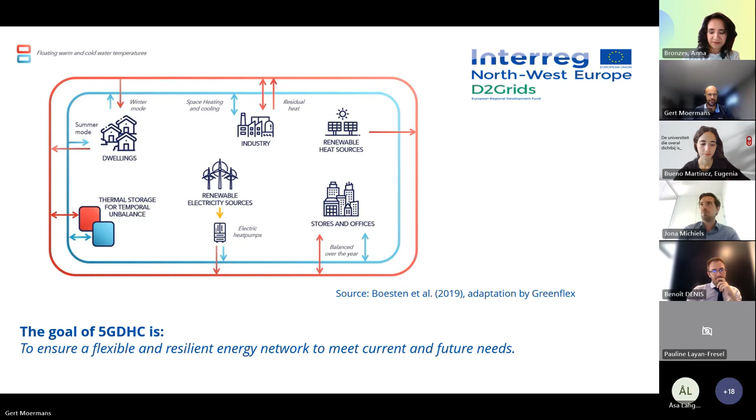This is what 5G is all about, and we summed it up in five core principles, which you may already have seen before. We aim for 5 core principles, which also nicely relates to a 5G network. The first one is that we like to close the energy loop. So we will focus on exchange of heat and cold between the end users.

The second is we want to use low-grade sources for low-grade demand. So we are certainly not focusing on high-grade demand. And if a high-grade source is available, we would only consider it as an extra and not look for a high-grade source as a primary source of the whole system. The third principle is about being decentralized. So we only want to deliver the energy when it's needed and where it's needed.

So we want to distribute the energy and elevate temperatures or reduce temperatures as close as possible to the end consumers or end users. And we want to integrate the approach of energy flows. You can already see that there's a solar pictogram indicated. So we want to integrate every possible energy flow within our whole system. And then the last one is focusing on local sources.

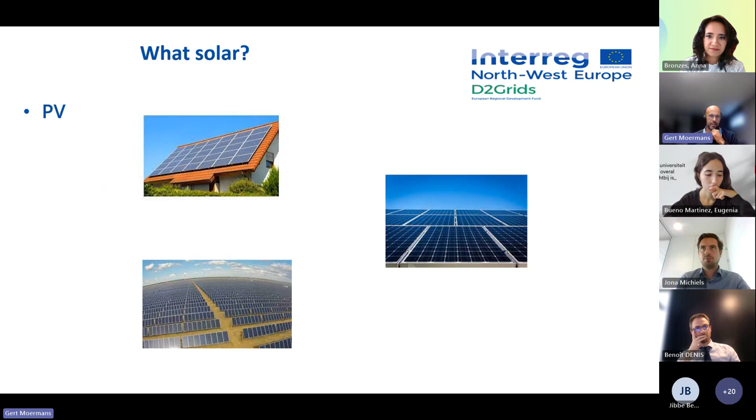I think we all know these PV panels, but when we look at PV panels in a 5G system, we mainly look at PV panels on an individual building, on an individual house, but they can also mean having a PV installation, like a PV field that is connected to the system. It can be small scale, it can be large scale, whatever. Then of course we can integrate it in the whole system. It's just, I think, well known for everybody in this meeting.

The next one of solar that we could use within a 5G system is to integrate solar collectors. That's mainly the same idea as using PV panels, only here the energy from the sun is directly converted into thermal energy and not into electrical energy. So we are producing hot water within our system that can be used by local users or can be distributed to other parts of the system.

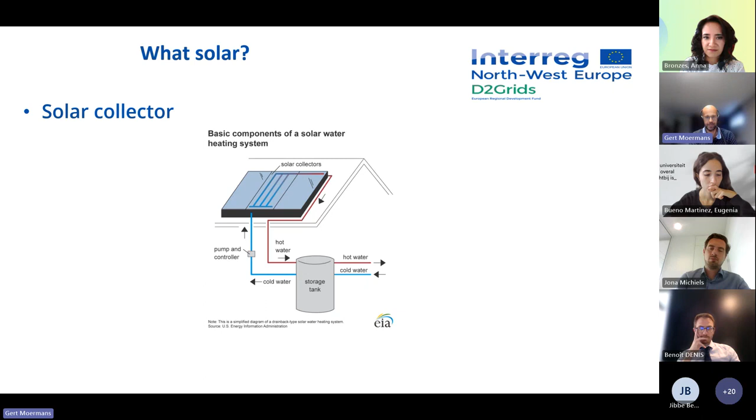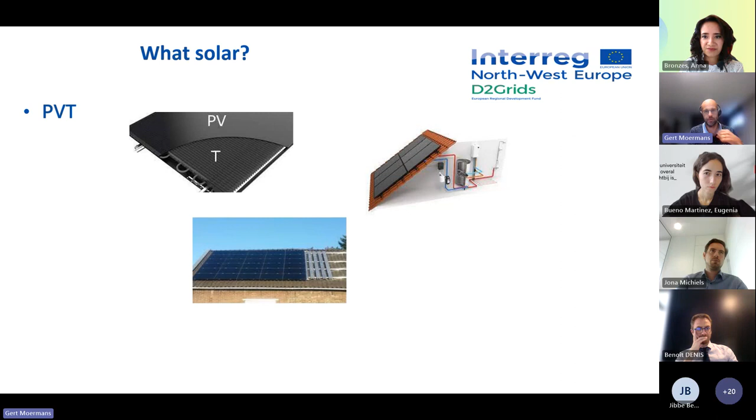I also would like to indicate, and we have a specialist who will give a presentation later on, that we can also use PVT in this setup of our 5G design, which is actually an integration of the two previous ones. We can use solar panels for production of electrical energy, but also for thermal energy. And when you combine these two, you come to a PVT panel.

The next one, more exotic, is using concentrated solar, which is kind of a big installation, and you will see in the next examples that it's not always the best solution to integrate it in a 5G DHC system. But I will use these four examples later on in the presentation to give you an idea if they're a good idea or not to integrate them in a design of a 5G DHC.

So for the CST, you have several options, but they mainly have the same principle. They use the solar energy with mirrors, which can be curved or flat, and they all concentrate their solar energy to one point at which you can have high temperature water production or whatever.

So why would we like to have solar in our system? And is this solar then a local source? Because the sun is not really a local source. Can we consider it as a local source? We said that in a 5G system we would like to have as much exchange of energy as possible, but how do we use this solar for exchange of energy? Can we store this energy somehow, because that will be needed if we would like to make use of this energy in all its forms.

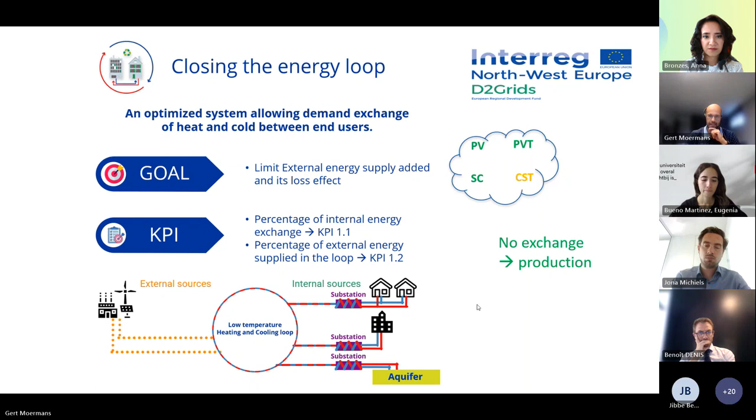We would like our system to be decentralized and demand-driven. So there too, we've set some KPIs. So we want to reduce the thermal losses within our ambient loop, and we want to have as much as possible active substations close to the end users.

It's not directly linked, but of course the PV, PVT, and other solutions, they are local, they are decentralized, they're mainly on building level. So they probably can have some influence. It's not clear. That's why I've put them in orange again. CST, however, is a centralized solution mainly, and they will not improve the KPIs of being decentralized or demand-driven.

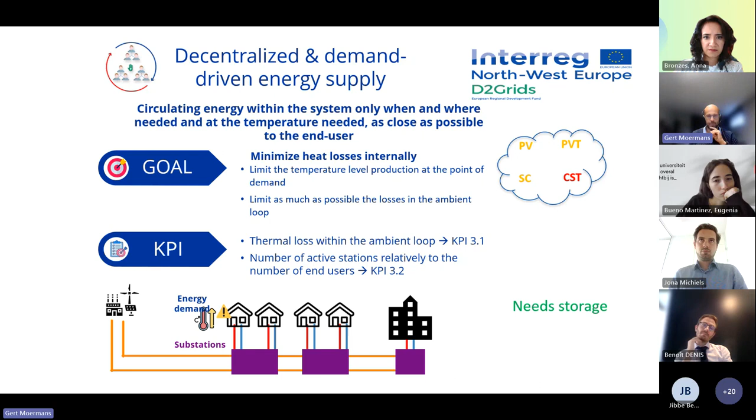So what we basically need to improve is we need storage. So if this electricity or thermal energy is produced on building level, and we want it to be decentralized and demand driven, we need storage to optimize this. So as a solution alone, it's not beneficial, but in combination with storage, it can improve the KPIs.

When we look at integration of energy flows, I think that's the most clear one. If we have other energy flows from electricity, from other sources like this concentrated solar, we will certainly be able to reduce peaks within our system, and we will hopefully reduce the total capacity which is needed for heating and cooling, as we have this as an auxiliary system, let's say, of our energy production.

This too needs to be combined, I think, with storage, and it is mainly focusing on heating. So for cooling, we have the conversion still of electricity to cooling via dry coolers or other systems that are installed.

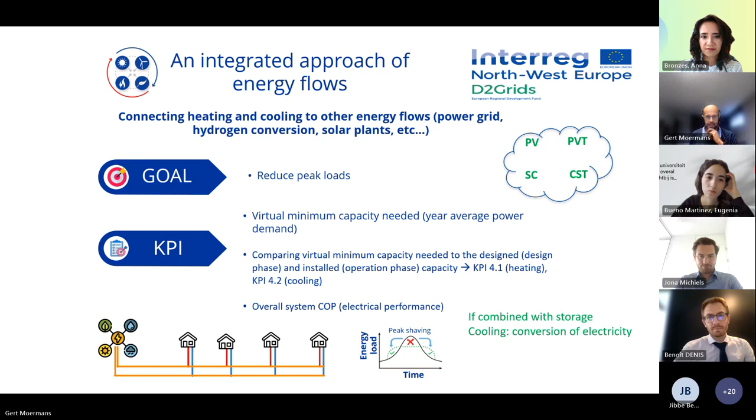Local sources, I think that's clear. If we have PV installed, PVT, solar collectors, or CST, they're all local sources, so they will clearly contribute to improving the KPIs of being local, of having local sources.

So as a summary, maybe, if we use solar and 5G DHC, solar, the electrical part, I think it's clear that there's a need for storage as well, combined to it, storage in some form. The most obvious one is battery storage, but there can be other forms as well. It can be conversion to another energy component. So there might be several solutions.

We can clearly do peak reduction of the electricity demand by using this locally produced electricity. So we will actually not generate big peak demands from the grid, at least not as big as they used to be before the installation of electrical solar PV panels. So we will reduce the electricity from the grid.

In some of the examples that we have studied, we could see that if there's an excess of electricity production, you could use this for balancing your geothermal, so for generating extra cooling. But this will influence the first principle, as you will probably not close the energy loop, as it's mainly done by dry coolers. So you will actually generate an open loop system. So there are some pros and cons to do this.

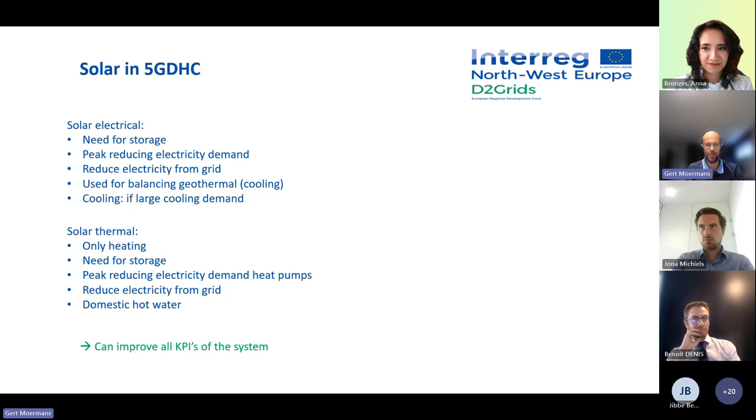Yeah, thank you, Gert. It was a really interesting presentation about KPIs and introducing solar in 5G DHC systems, and really this question about, like, if the solar improves the KPIs. I think we're almost convinced about that. And let's hear other presentations of our speakers, and we can draw up some conclusions at the end.

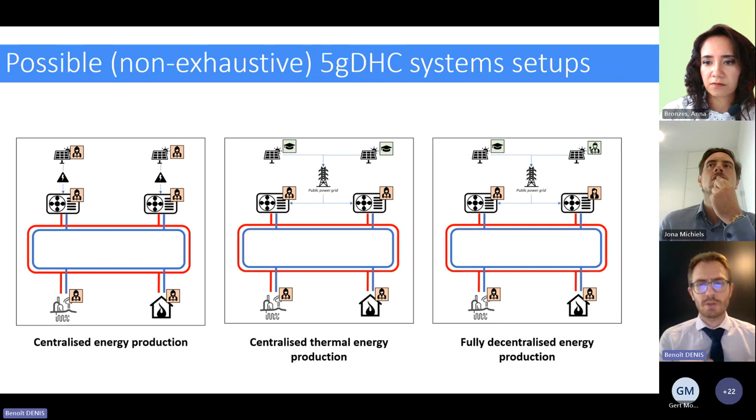And then once you have all these ideas of who produces what, you can play with your 5G DHC system, because, for instance, here in the figure you have on your screen, you can have some dwelling somewhere over the network who produces electricity and can give it away to the heat producer, which is another dwelling, another part of the network, because this dwelling needs heat at that point in T1. And then in T2 maybe you cannot produce solar energy, but still the solar producer, who is also a dwelling, needs heat for his own benefit.

And then you can also have mechanisms where you exchange solar power in the first period in exchange for heat in the second period. So the fact that you can couple both technologies gives you a lot of flexibility to the system, even though you only rely, for instance, on financial mechanisms and not only on thermal storage. You cannot couple solar power to 5G DHC systems the same way in other countries because of the regulations.

The most common way to commercialize, for one PV producer to provide electricity to a heat producer, you will find pretty much all over Europe, except, if I'm not mistaken, in France and in the French part of Belgium. You can install your PV power plant anywhere on a private grid and then sell your electricity to, I don't know, the owner of the house. That's the basic framework, and that's the most efficient framework. But unfortunately, that's not the case we see in France.

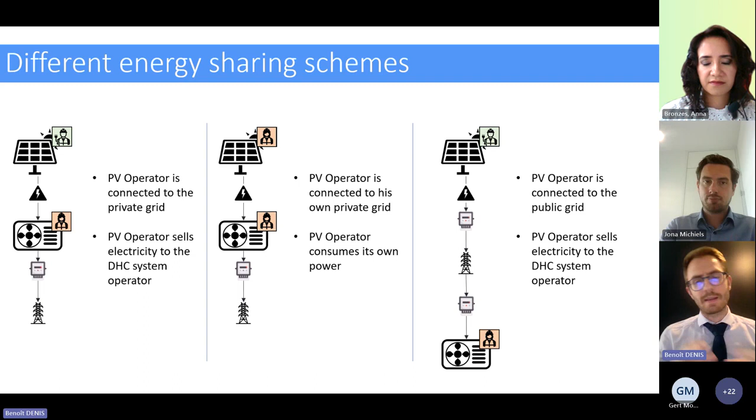You can also have another framework which is allowed in France, where the same person who produces solar power also produces the heat. Basically, that would be the house owner having his own solar panels. But that means he needs to operate it by himself. And then you have a third scheme, which is available pretty much everywhere over Europe, where you can connect your solar power plant to the public grid and then sell your electricity to the heat producer. But all these schemes, it's not always that simple, and you have some constraints.

What you have here in France is the only way that someone can produce solar power to his own benefit and to power the heat pump: you need to be the operator of the solar plant. The only flexibility you get is that you don't need to be the owner of the solar plant, but still you need to be declared as a solar power producer if you want to be able to consume your own energy.

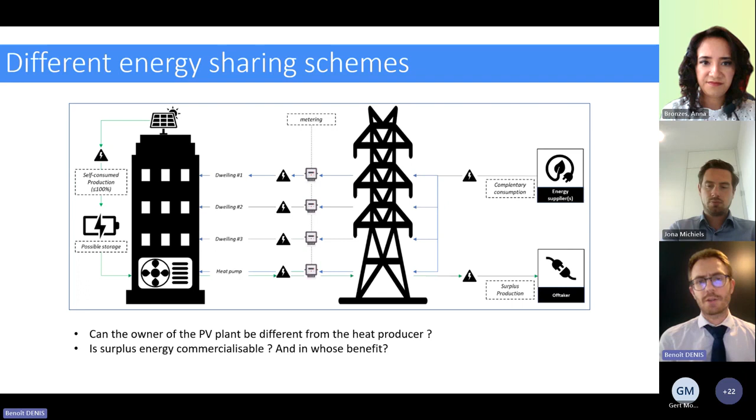The second scheme that we have is what we call a collective consumption scheme. Under this scheme, you basically have a power producer who injects the electricity into the public power grid and sells it to some specific customers. It's been hard to develop the whole scheme, but now it's pretty efficient. But there are a lot of tax disincentives to this solution that make it less attractive than the first one that we saw before, which is the individual self-consumption scheme.

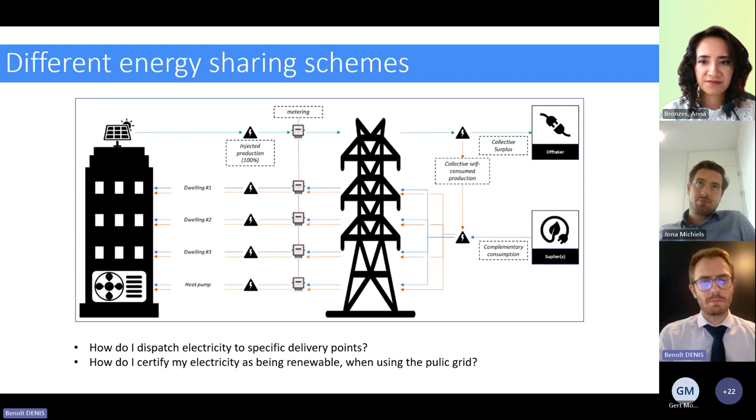For the collective self-consumption scheme, there are lots of constraints. You need to sell to somebody who is within a 2-kilometer perimeter. You cannot have too big power plants. It's electricity only. But the good thing is the way the electricity is dispatched to the withdrawal delivery point. This is all done by the distribution system operator, which is much less expensive than what you would have in power purchase agreements.

We have one last way of distributing and commercializing energy, and this last way is through power purchase agreements, what we know as power purchase agreements pretty much everywhere in Europe, which is a direct agreement between a producer and the consumer. By itself, it's not that difficult. You have a producer, you sell all your electrons to the consumer, and your consumer is the heat producer, who uses it for his heat pumps, and that's basically simple.

The problem is that where you have a 5G DHC network and decentralized production and decentralized consumption, you may need one production asset to be able to dispatch the energy to several consumers. That would be the most efficient way of maximizing renewable energy use within the network.

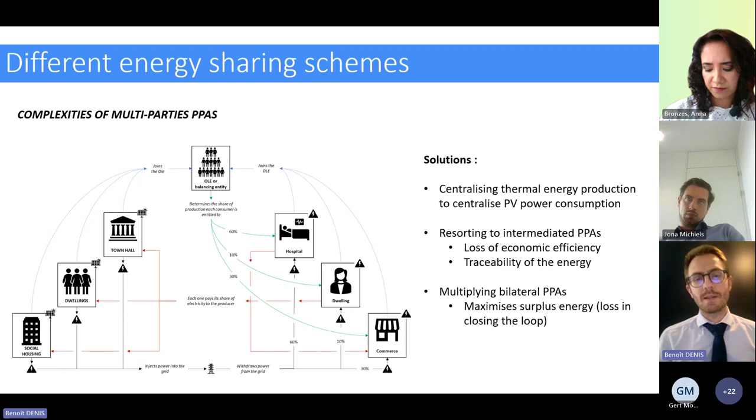The last solution would be to multiply bilateral PPAs, which would mean the town hall enters into one PPA with the hospital, with the dwelling, with the commerce, and so on. But that would be an extremely tedious exercise, and we would really not want to incentivize these kinds of solutions.

We need also to consider taxes, which are a very, very important key of solar energy projects and their coupling with the 5G DHCs, because usually taxes are capable of making a business case or not. In France, and you will see the same kind of tax regulations pretty much everywhere else,

you will almost all the time have an excise duty, which is a tax that is imposed on consumption. In France, it ranges from 22.5 euros per megawatt hour to 32 euros per megawatt hour, depending on the power that you request. Before the events in Ukraine, excise duty amounted to about 1/4 to 1/3 of electricity invoices every month. So this is really important.

Then you have grid access fees. These are fees that are used for public grids. And then production tax, land tax, VAT that we may all know. The way you can find tax exemptions will be crucial to setting up your coupling.

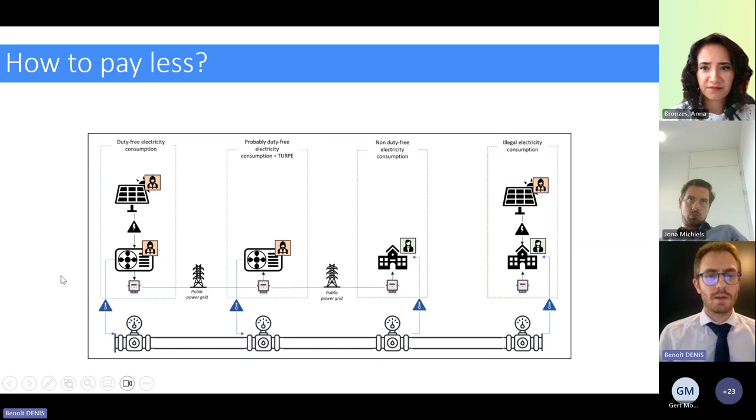All these amount to some organization of your operation. We are talking here about energy projects, and when you think of energy projects, you will always have these five items in mind. The first one is grid connection. You will need to have a relationship with the DSO, because whatever the setup, you always need to connect your plant to the public grid, or at least in France that's the case. You cannot be fully off grid without declaring your power plant being off-grid and somehow connected to it.

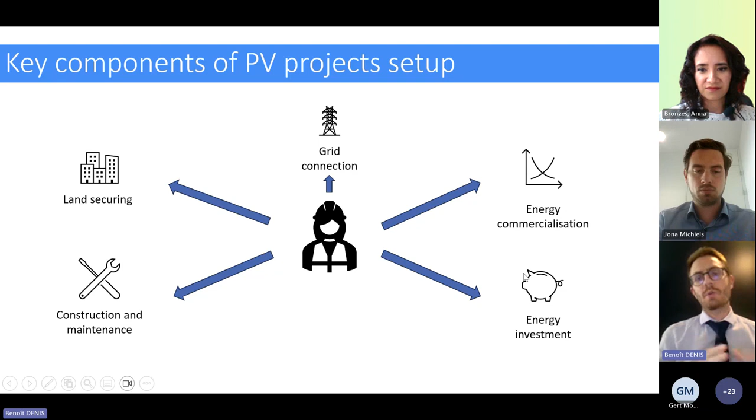You have construction and maintenance, obviously, except if you are capable of doing it by yourself, but that's almost never the case. Energy commercialization, which we already saw a bit before. Land securing, which is you need to put your solar panels somewhere, and so you need to be sure that you have the right to put them there. It's straightforward when you're the owner of the building. But when you think about 5GDHC systems, you will have public buildings, commerces, a lot of different situations. So you need to really focus on land securing. And the last one is the energy investment, which is really proper to any project finance project.

In terms of land securing, what you will seek are long-term leases, because if you dismantle a solar power plant, the value of the power plant drops so much that once it is in place, you really need to make sure that it stays in place until the plant is dead. So you need a long-term lease for 20 to 30 years minimum. What you also need are in-rem rights. It's a special kind of rights where the rights follow the building and not the owner of the building, which means that if the owner sells the building, you can keep on staying on the building. If you don't have these in-rem rights, the next owner may kick you out, and then you will be in big trouble.

The second one, with respect to construction and maintenance, you have the EPC contracts, engineering, procurement, and construction contracts. Make sure you have a performance guarantee in these contracts. What we see is about 95% of performance, which is unlikely to be accepted in operation and maintenance contracts. Completion bonds: you usually have a retainer of about 5% to make sure that the solar power plant is fully completed. And then you have the operation and maintenance contract with an availability guarantee. You need to have your power plant available about 98% of the time. Loan agreements and securities, that's basic project finance, not really necessary to develop here.

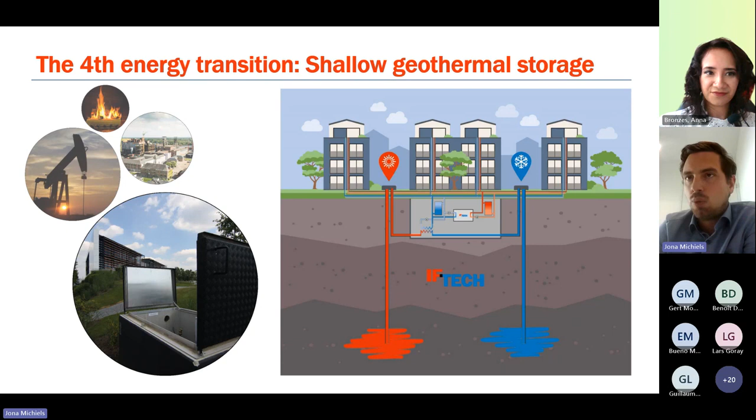So what we do is shallow geothermal energy storage. When we talk about geothermal storage, we don't go deeper than 250 meters. Most people will think of geothermal going way deeper, higher temperatures. But what we will do is basically create an underground thermal battery storage for heat and cooling, where we would capture the heat in summer and use it in the winter, using the thermal battery storage and a heat pump where we have very high COPs.

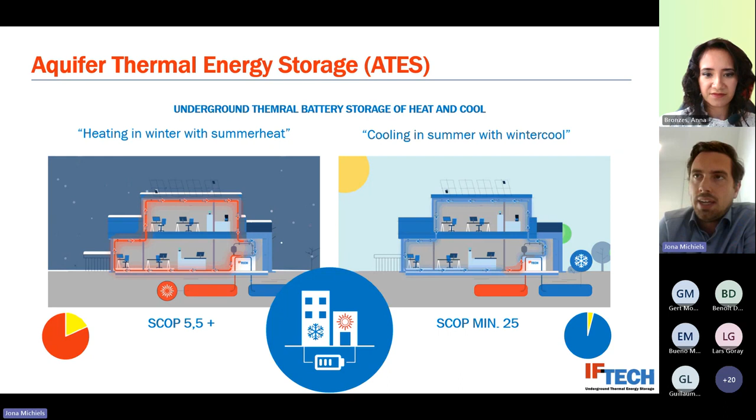Whereas in the summer, we would do the opposite. We would use the winter cool for cooling in the summer, with even higher COPs that we can achieve. So what we basically do is we connect the usage of heat and cool via a geothermal battery in the underground. Now, the technology that we would use and that we have the most in-depth knowledge about is ATES.

This is an open system where you would use an aquifer below the ground, where you would pump the water and thus create a cold and a warm bubble under the ground, which is protected in this aquifer. You can see the potential here in the Flemish region, because that's where we have the most projects, where you can see that it's not an easy fit. It's very dependent on the geothermal conditions. In the east of the country, you would have a big potential for open systems. It's not so much the case if you go more to the west.

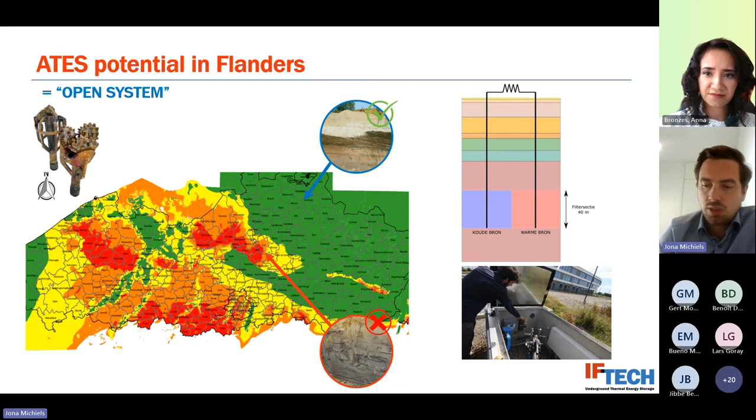But you can also use BTES, which is a closed system where you would basically have a heat exchanger in the underground, so we won't be pumping any groundwater. And here you can see the same map of Flanders, but this time the potential for the thermal conductivity in the underground. So this technology you can use almost everywhere. It's more universal, but especially for bigger projects, it's more expensive, and you have less efficient COP yields on the technical side.

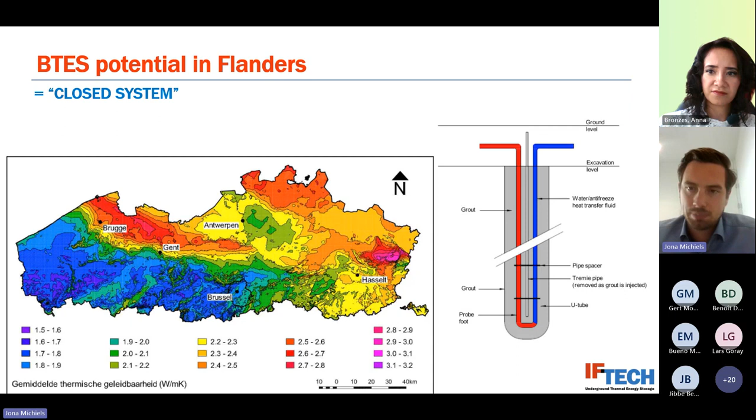A small word on who IFTech is: still a young company, 20 years now of primarily national but also international experience in the Netherlands and the UK. A clear mission and a young, driven and dynamic team that is very eager to reduce a lot of carbon dioxide emissions in new building projects.

I have with me two use cases, one already finished, the other in development, where we have installed a 5th generation district heating network. The first one is in Hasselt, which is very much to the east of Flanders, where we have 25,000 square meters of retail and a bit more than 400 dwellings, all apartments. Everything is, from an economical side, organized in an ESCO, an energy service company.

So we financed the groundwater system and the distribution, and going into the buildings, that's where our assets end. So the heat pumps in this case are not a part of the ESCO. We only provide the heat pumps with the necessary temperatures that they need for the high yields, but we don't have them in operation.

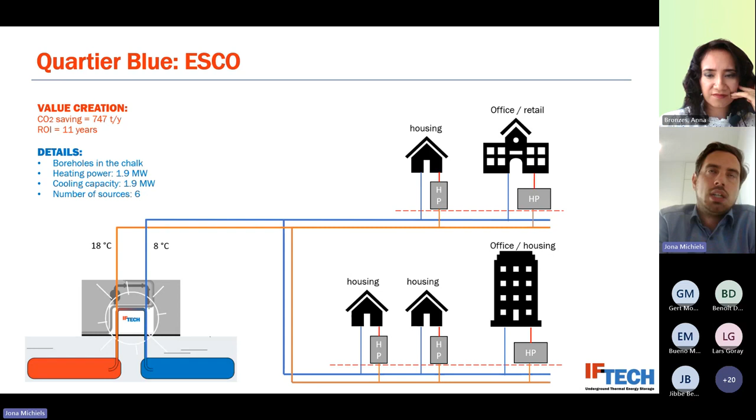In this case, this technical design with an ATES system results in an annual saving of about 750 tons of CO2. This is compared to gas, because that was still an option when this project was developed, and a financial return on investment of 11 years, doing 6 boreholes in the chalk, with a heating and cooling capacity of about 2 megawatts.

Now, the system that we use here, simply because we have multiple users, retail and dwellings, so apartments, with different needs of heating and cooling, is a 3-pipe system where we supply a semi-constant temperature of about 15 to 20 degrees, which all the users would use to make heating.

And when they make heating, so in the case of the dwellings, they will also produce cold, cooling, which then gets collected. But the opposite happens with primarily the retail that uses a lot of cooling. When they make cooling, they produce heat. So especially in autumn and in spring, the whole system in itself is already in balance.

We see, for instance, that the retail starts already in February, which is still a very cold month in Belgium. They already start cooling. And so there are multiple days in the year where the demand of heat and cooling on the district heating network is about the same energetically. And so we won't be using the groundwater system at that time. Of course, in summer and in winter, you'll have a dominant demand for heating or cooling. And then we would use the groundwater system, the ATES system, to balance the neutral net.

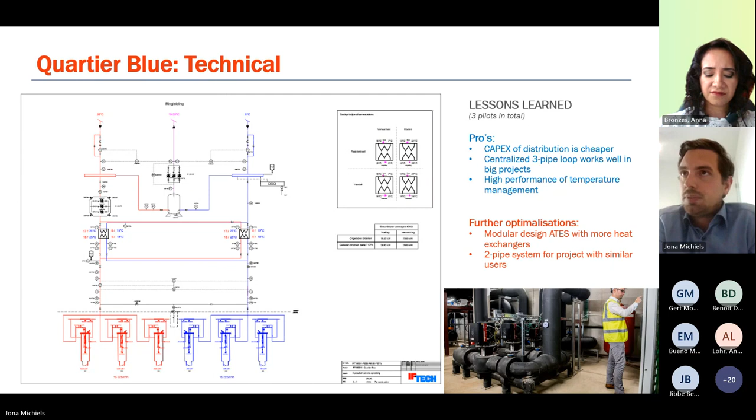Now, in this case, we don't use PVT, so we do need a balancing system, since the demand for heat and cool is energetically imbalanced in this project. But we use here surface water. That's simply because the project is located next to surface water, which is a very easy and a cheaper way to restore balance. And you can use this source either in winter to charge cooling, or in summer to charge heating, to balance out the entire system.

PV here, since the real assets that use a lot of energy, meaning the heat pumps, are not part of the ESCO, we don't have a big installation of PV. This is limited to only 50 kilowatt peak, which could be a lot more if the heat pumps were also assets of the ESCO. We are, however, still looking at an EMS implementation to have a better prediction of the yield of PV, and to then optimize our auto consumption.

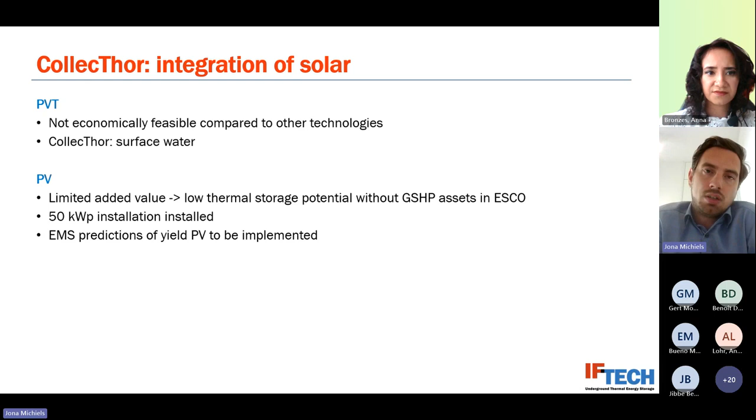Another project is Hertogensite. It's in Leuven, which is a more difficult underground for an ATES system. The very first phase we did ATES combined with surface water, but all the other phases will be BTES, because it was proven technically not feasible, or too expensive, to keep on using ATES. This program is about 10,000 square meters of retail and 465 dwellings. On the geothermal side, we would use 288 boreholes for a 2 megawatt heat and 1 megawatt cool capacity. And this would also reduce CO2 emissions by about 1,000 tons annually.

Here, it's also provided with an ESCO, so we provide heating and cooling as a service. So there are buildings with collective heat pump systems, where we would supply central heating temperatures, but everyone still has their individual booster pump for domestic hot water. So that's something that we do not provide in this ESCO.

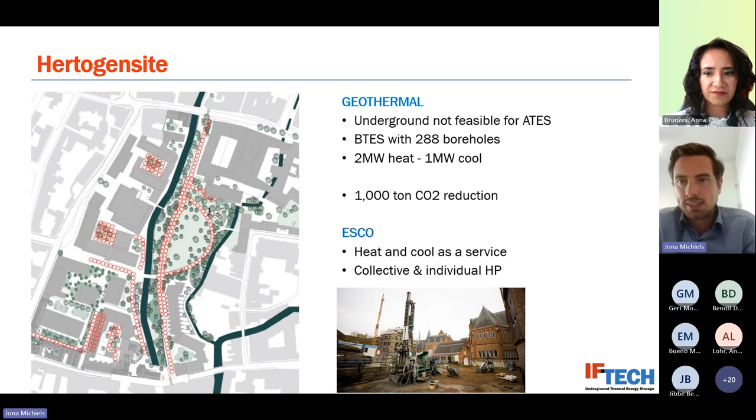Once again, if we look at the integration of solar, PVT, same issue here. I see that there's a small error in the presentation, where here we also use surface water. So you could also use more active cooling if, for instance, your primary demand is heating, or in most projects where we don't have surface water available, we would use air source heat pumps to balance out the demand between heating and cooling.

When we look at PV, since the project is still in development, we're still looking at that. Here we have a more lucrative business model and more added value, since the centralized heat pumps are a part of the ESCO, we could use this higher thermal storage potential to produce an excess of heat, for instance, when there is an excess of PV, or we would make active cooling when there is an excess of PV, but that's still to be determined.

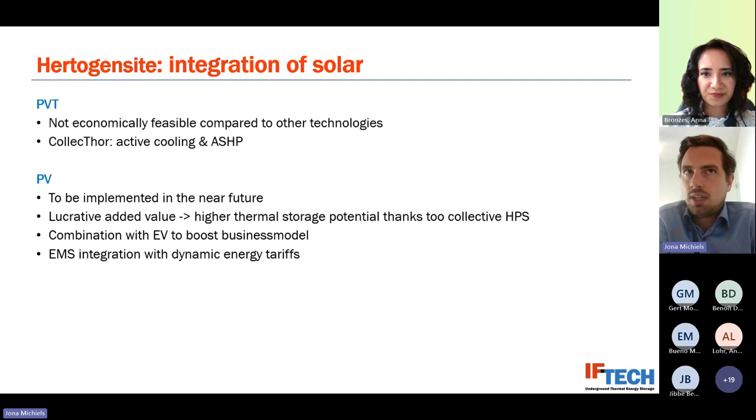And of course, here we're also looking at this EMS integration with a combination of dynamic energy tariffs, either by the availability of PV on site or just the actual hour-on-hour tariffs of electricity, where we simply could change the hour on which we would produce heating or cooling, depending on the tariffs that are active on the grid. So that was it from my part.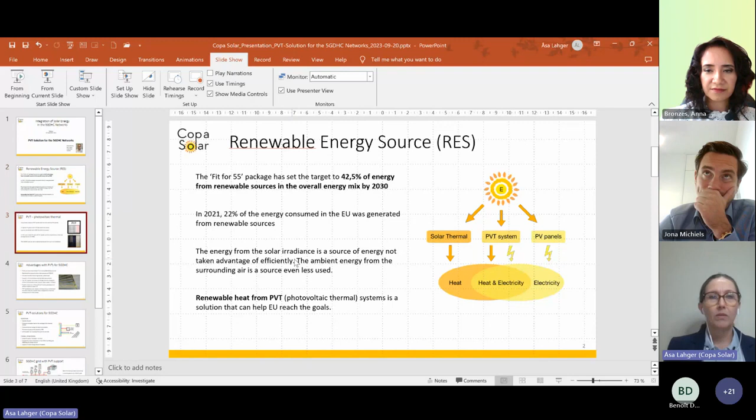In order to meet the demands for Fit for 55, we need to meet the new demands, 42.5% of RES, renewable energy sources. The possibility to use more of the solar irradiance exists, instead of just producing electrical energy from PV panels. With the help of PVT panels, we can produce much more energy. So the solution with our PVT panel is, if you see on the right, we have an absorber fitted on the backside of a PV panel. And instead of having only the installed electrical power of 420 watt peak, you can add onto that 2,700 watt peak thermal power as well.

So, for example, if you would install a PV park with 371 panels, but with the absorber on the backside, you would actually have a thermal energy source of 1 megawatt. So this solution is very suitable for the 5G DHC grid, and it would be the boost that you need to stabilize the whole grid.

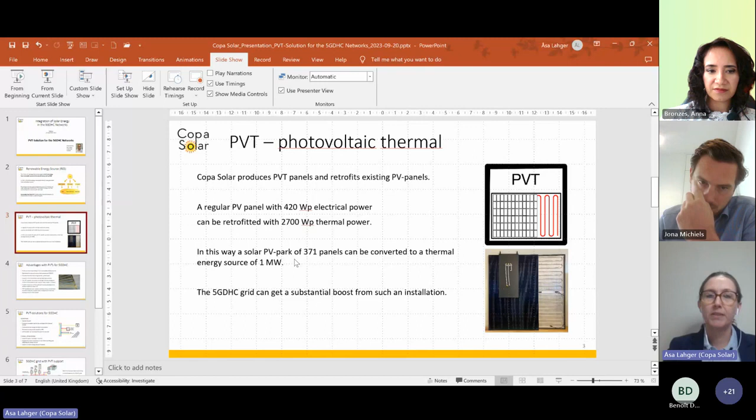What would the advantages be when you do this kind of retrofit or the new installation with PVTs? You would still produce low temperature energy from a renewable energy source. The system is optimized for ground source heat pumps and therefore also for the 5G DHC grid. It provides thermal balancing for the system load, and it also supports the TES installations that you would have within the grid, especially during high load periods.

So if it is winter time and there's a high need of thermal heat, then you would actually reduce the amount stored in your storage, and you can revitalize the whole TES system with the help of the PVTs.

It would also, of course, always support the daily usage within the grid. It enables also the expansion of the grid. For example, if you want to build new housing, but also if you are expanding your factory, or the need of energy is higher, then you can add more PVTs into the system instead of installing new TES.

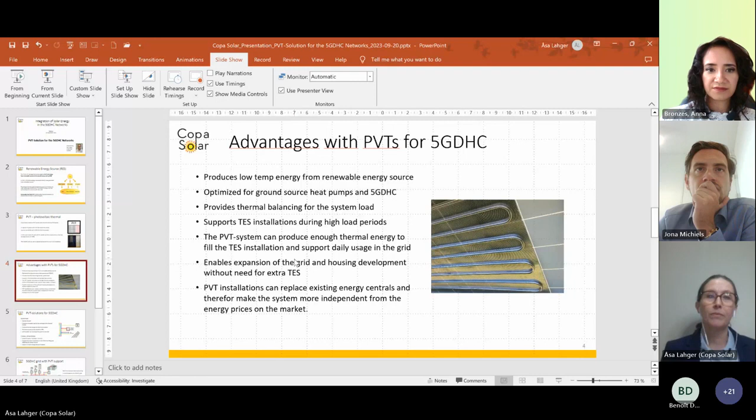A PVT system can cool down the warm or the cold side as well if there is an excess within the grid. Thermal lifting stations would be smaller parks, about 500 kilowatt peak, and with this help you can lift and stabilize the energy amount within the system. And you can also use it to lower the energy if needed.

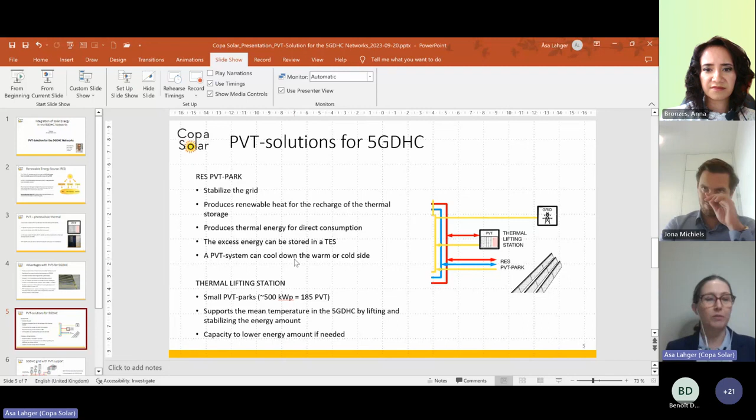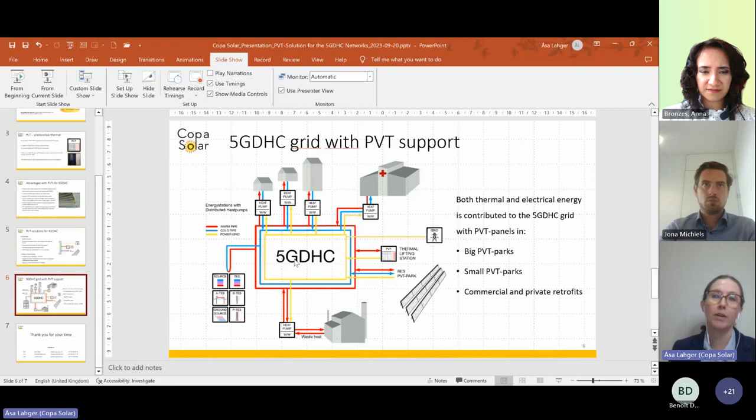Different types of sources and TES would be needed depending on where you are situated. Like in Sweden, we have a lot of BTES, but within Europe, there are many different solutions. So the electricity that is produced from the PVT parks is also adding to the energy mix within the grid, and therefore you can use it to stabilize the system, but you can also mount it on commercial and private housings as retrofits.

Both Andreas and I would gladly answer any questions later on. Anna, you decide when. And we are at the moment also planning for about 6 installations with at least 5 megawatt thermal power within Denmark and Sweden. So that's what we are working with at the moment.

Thank you very much. Thank you, Åsa. It's really not common to see integration of PVT in 5G DHC networks. At least, as far as I know, none of our pilot sites in the D2Grids project has installed PVT. So thank you for introducing this solution. I think it could be really interesting for some of the 5G DHC Industrial Alliance members.